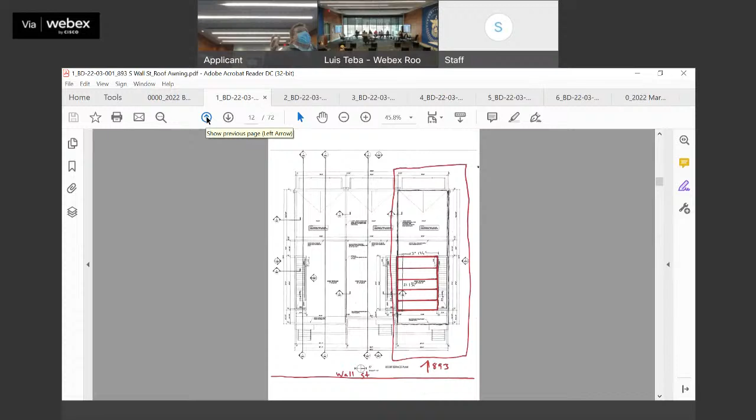Oh, got it. So is it, Bill, am I reading that right? It's aligned with the doghouse, is that right? Correct. The previous structure that was approved, the rooftop patios vary a little depending on if you have a doghouse on one side or both sides. The one previously approved had the doghouse but open air on the other side, so it needed a more permanent structure since there were no legs to support an awning on the other side. On our rooftop, our doghouse lines up with the doghouse of our neighbor as well.

So we have two higher built areas to connect horizontal beams to, so we don't need anything vertical coming up. Based on the drawing, we're looking at something with horizontal posts, with fabric in between. We chose, based on the size, to fit perfectly 5 four-foot sections. You can see from the pictures provided there's a slight view from the street, but Wall Street being a more residential area, even the picture taken across the sidewalk shows there really isn't too much visual, even with it spaced above the door.

We would prefer to have it spaced above the door because that area gets very hot. That stairwell isn't connected to the air conditioning, there's just a vented fan. So having that extra drapery above would help keep that area and doorwell a little cooler in the summertime. So our preferred design would be the one that fits perfectly, that 20-foot span.

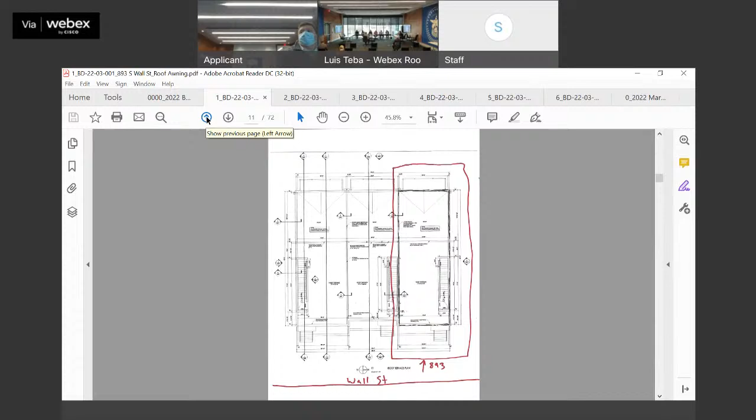But obviously we want to make sure we fall in line. Can you show us the picture recommendations that show the streetscape with the drawings of the elements from the streetscape? My recollection is there's a picture that actually shows this. Yeah, it's right there, so you can see it.

The previous one we approved was facing Whittier. Correct, and in that case we shoved it back behind the door so visibility was lessened. Were you aware of the recommendation that we wanted it behind the door? I know they wanted it pushed back, but I also know, based on the design of that pergola, it was more square in nature, so I didn't know that was a firm recommendation. I also know we face a more residential street, being Wall Street, so I wasn't sure if that provided some flexibility either. And the two doghouses line up in terms of plan. Yeah.

This one faces east towards Wall Street. Do I have my bearings right, Bill? Got it. So it has less of a distant view than on Whittier. Right. And we did try to keep the materials and colors very consistent with the building. The rails are all black aluminum, matching the window inserts. The fabric we picked was a taupe beige, something more neutral. So we knew even with a little bit being viewable, we didn't want it to stand out within the unit.

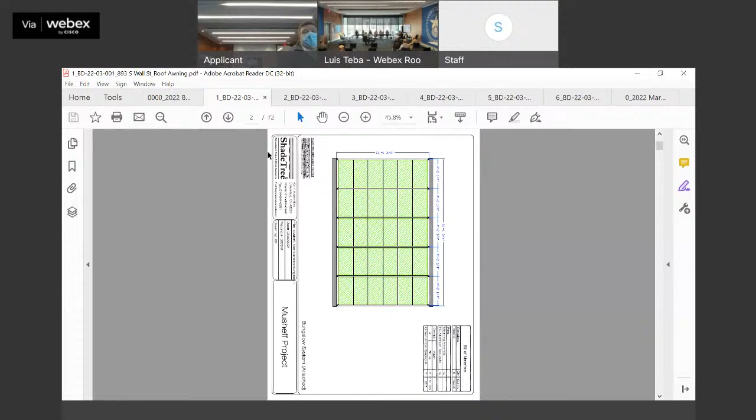Pushing it back 4 feet. Sorry, second the amendment, you can insert the numbers. He was having trouble finding them.

Great, thank you. All those in favor of the motion, please signify by saying aye. Aye. Opposed? Thank you, motion passes.

Thanks. Thank you, appreciate it. Yeah, good luck. All right.

On to new applications. Connie, is that application number 2203-002? Yeah, 915 South Front Street.

Hi there, can I have your name for the record, please? Patrick Mulligan. Thank you, Patrick. Can you raise your right hand, please? Do you swear or affirm to tell the whole truth and nothing but the truth? I do. Thank you. Connie? And Daniel's brother or something? Yes.

Okay, so this has a few different parts: new windows which were already removed and installed, vinyl windows, installing new siding because some siding has been removed, exterior painting of the previously painted brick and stone, and repair of an existing vinyl soffit.

The work was begun prior to review and approval when a code order had been issued. The main entrance for the house, originally on the facade, was converted to a window sometime after 1960.

They did actually do a good job, you could hardly tell that it was a door there. A one-story side addition was then built as a new main entrance.

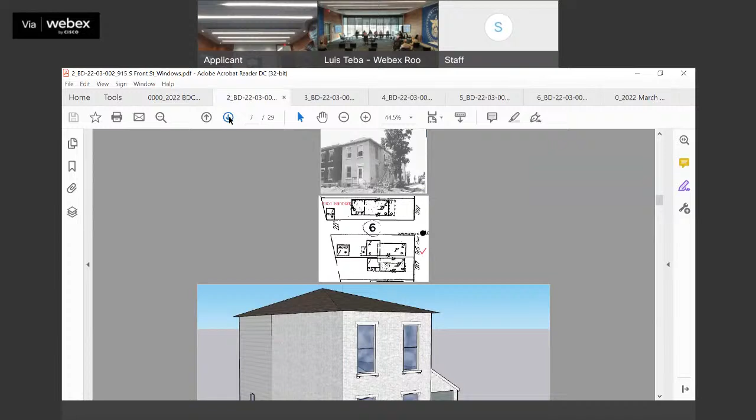In addition, at least 2 north elevation windows were bricked in, and a second floor window was converted to a doorway with an exterior stair. There's a small window opening in the small inset porch and 2 large window openings onto the interior space of the side addition. In other words...

This is outside, this is looking inside. When was that porch enclosed? I don't know exactly, approximately after the 1961 or '64 photo.

But you didn't know. We haven't been able to find anything on the outside of either. All right.

And so, let's see, there are no known photos showing original windows on the side of the addition, so we don't know what was on that odd addition there, until the ones were removed, which we have pictures of, they had the big diamond patterns in them.

Let's see, so business meeting comments included: what is the reason for removing some window openings on the rear elevation? And paired or triple 1/1 double-hung sash should be installed on the side addition to match the character windows on the remainder of the building.

So, in other words, I think the commissioner was saying, instead of these sliding windows or whatever they are, there should be paired or triple double-hung windows. This is side by side, double-hung. Yeah, yeah.

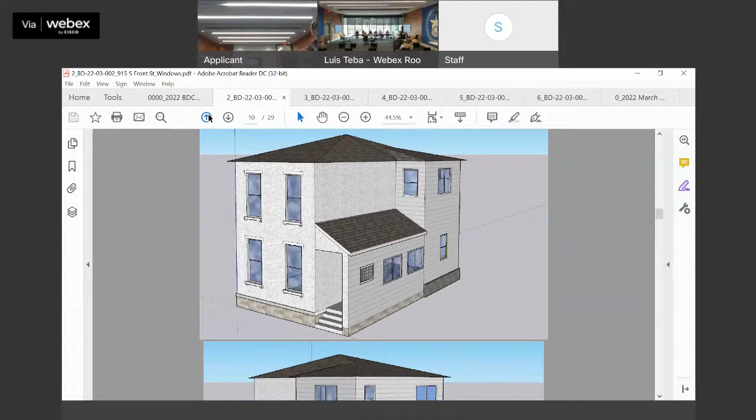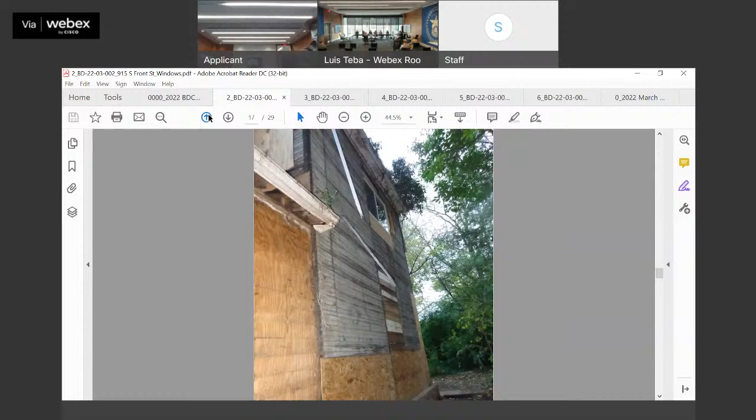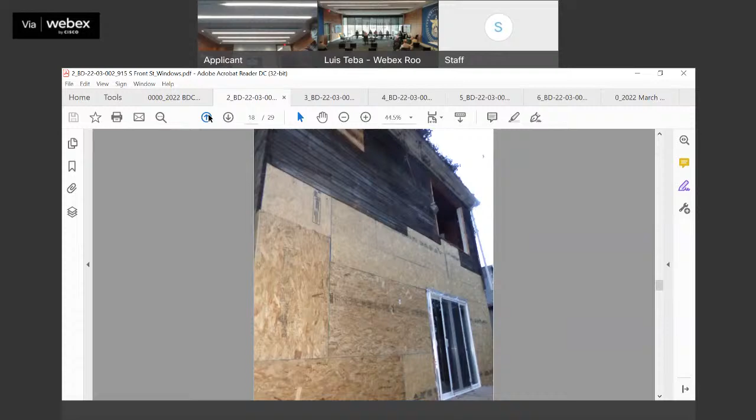New wood or hardy lap siding should be installed, as already mentioned, at both places. Exterior painting also with colors to be submitted to staff. Recommend installation of new windows with a complete window quote to be submitted to staff.

All right, so anything you'd like to discuss with us this afternoon?

No. So when we went in there originally, that back addition they added at some point, a lot of that was rotting out. That's why we started replacing with the OSB. We were worried it wasn't going to hold much longer, so we went and replaced some of the studs and joists, and replaced some of that sheathing.

Yeah. You want to talk about the rear of the building?

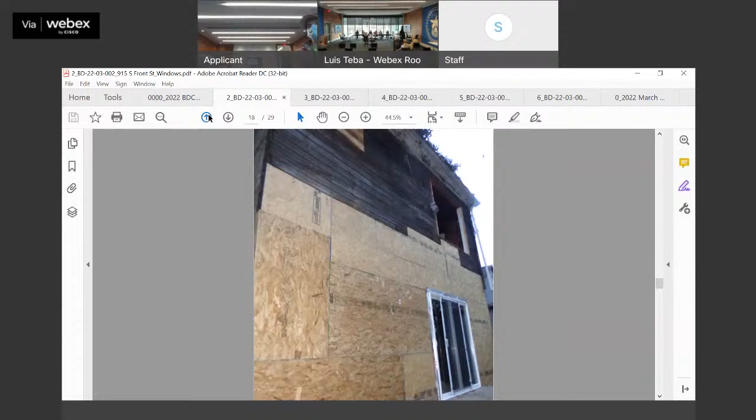What do you think is behind this little window opening? Well, we'd need the same size. So we're just going to, why were these removed? That's my question. So we're just going to replace the windows with the light openings. We have it all temporarily sealed up, but we'll order a standard window for that small one. Standard height all the way around.

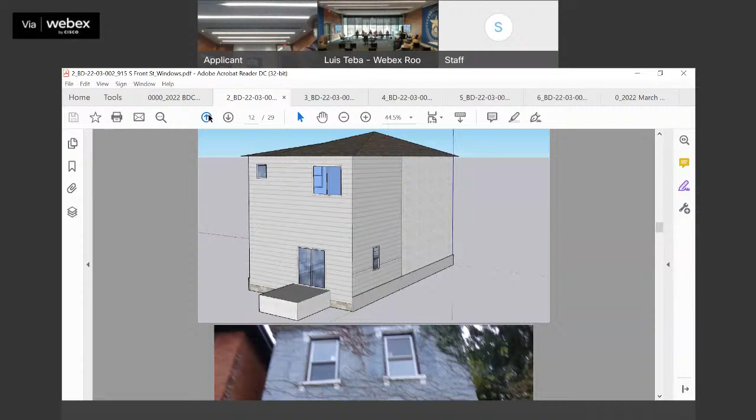But that's not what is shown on your rendering. Can you go to the rendering? So that's not what's shown there. So there were two windows on the first floor. On which part? Right here. There was a window here, and there was a window here. And you have those not being shown.

In the original house, is this facing an alley in the back? Yeah, it faces those railroad tracks. Oh, the road. Even better. The backyard is just directly there. Luis, would you go to page 3 for us in the PDF?

I think that's a photograph, there it is. Connie, you're suggesting those windows that, thank you. So these were window openings, maybe it's okay to remove them, but the question was why were they removed? The interior of that is where the kitchen was. We were hoping to remove those to add more cabinet space. We figured with it facing the back, it's fenced in on both sides from the neighbors, so it wouldn't have much historical impact on the look. People won't be able to see it.

Same for both windows? Correct, they're both in. Got it. I mean, typically for the rear facade, as long as it's not viewed from the public right of way, we're more liberal about making changes to it. Yeah, and that's the original addition, right? That's an addition to the original house, right? Correct, it's an older addition. When do we think the addition is, just out of curiosity? I mean, the addition is old. It's old, historic, so.

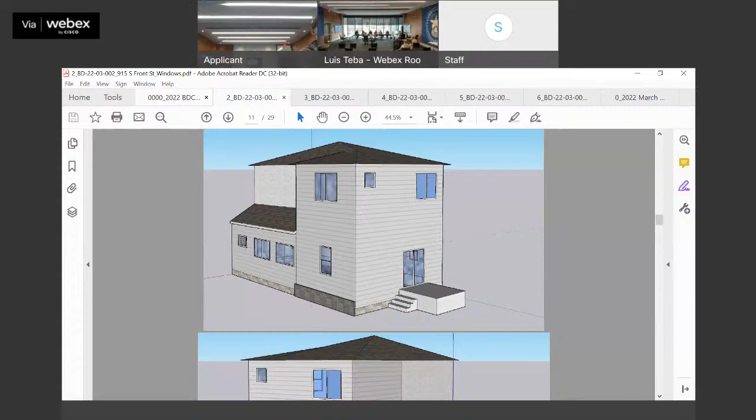915 South Front as presented, with the exceptions changing all windows to double hungs in a more historic proportion in the same locations shown on your sketch. And when the opening is larger than a single double hung, make it two double hungs.

Using Hardie 4-inch lap to 5-inch lap siding and corner boards, for staff approval, except for the rear of the building, lower story, where you've taken away two windows and put in sliding doors.

And I think we're okay with that. I think that opening was already there. Yeah, right. I'm just noting it wasn't part of his motion, so amending. Could I ask something, please?

Could I ask the reason you are allowing the two window openings on the first floor to be closed? I think we stated this was an alley-facing rear part of the house on an addition. We have very little historic record of the house anyway, and we've generally been more flexible on the rear of houses. I think that's what I heard.

It's not even an alley, it's railroad tracks. Yeah, and the river. Right, so no view from the street.